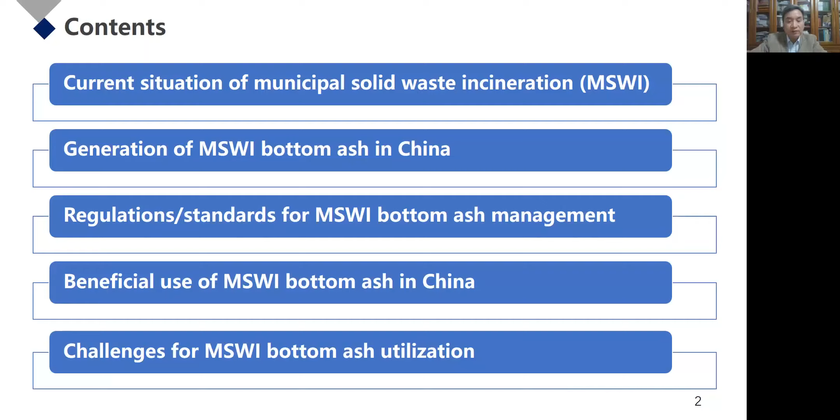Now, I will give you a brief introduction on the current situation of municipal solid waste incineration in China, the evolution of treatment capacity, and the uneven distribution in different Chinese provinces and cities.

Among which more than 99.8% were thermochemically or biologically treated or disposed of in sanitary landfill, while in the year 2002, the value was only 54%. To deal with the huge amount of solid waste, incineration with heat recovery has become the priority choice in China because of the significant volume and mass reduction, hygienic risk reduction, land saving, energy recovery, and it can be located closely to the source compared with landfilling.

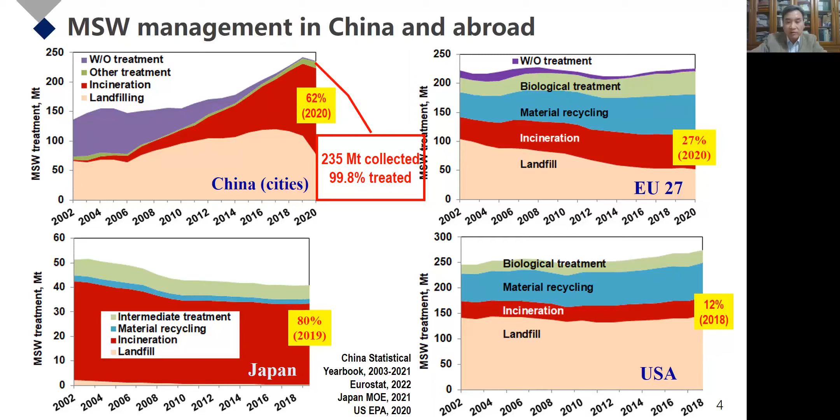Therefore, a rapid increase for incineration can be observed. In comparison, the incineration ratio in European countries, Japan, and the United States have been relatively stable in recent years, ranging from 12% in USA to 80% in Japan.

Incineration has become the mainstream technology for municipal solid waste management in Chinese cities. The treatment ratio by incineration increased from 2% in 2002 to 62% in 2020. The number of incineration plants reached more than 460.

In addition, the average treatment capacity of the incinerators is increasing too, around 1,030 tons per day in 2020, indicating that small-scale incinerators have been shut down and more large-scale incinerators have been put into operation in view of treatment efficiency or secondary pollution control.

All of the incinerators are equipped with heat recovery systems and steam generators. The increasing trend of incineration was also found in counties, where the incinerated waste reached 17 million tons in 2020, accounting for 25% of the collected domestic waste.

In September 2020, the revised law of China on prevention and control of environmental pollution by solid wastes came into force, which addressed nationwide waste classification and source separation. This encourages the continuous construction of new incinerators, as well as the booming development of biological treatment facilities for source-collected food waste. Furthermore, the zero landfilling of raw refuse promoted in many cities results in a significant decrease of landfilling ratio.

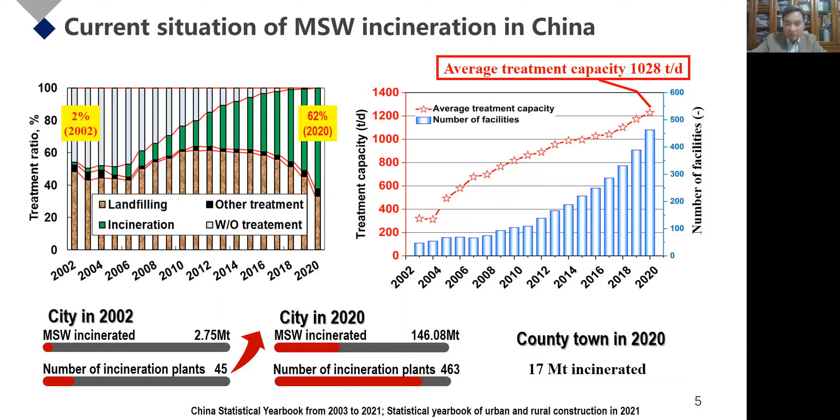According to the development plan of municipal solid waste classification and treatment facilities in the 14th five-year plan, the incineration capacity will further increase and exceed 65% of the total capacity by the end of 2025 for the whole country.

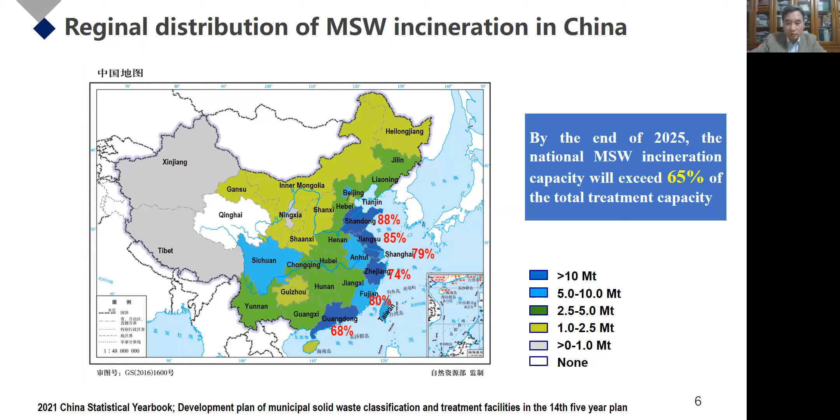Due to the great variance in population density, economic development level, climate differences, customs, etc. in China, significant difference of waste incineration in different provinces was shown in the map. You can see in eastern areas, which are densely populated and more developed, the majority of municipal solid waste is incinerated. The quantity of waste incinerated in the three provinces, Jiangsu, Zhejiang, and Guangdong, accounted for 1/3 of the total incinerated waste in the country. As a result, more bottom ash is produced in these three provinces.

Since so much municipal solid waste is incinerated, then how much bottom ash is generated? And what about their characteristics? The generation of bottom ash is significantly influenced by the types of incinerators.

There are mainly two types of incinerators adopted for municipal solid waste incineration in China: grate furnace and fluidized bed. It was reported that the yield of bottom ash from grate furnace is around 15 to 25% in the cities, while that from fluidized bed incinerators is only 5 to 10% on a mass basis of the incinerated waste.

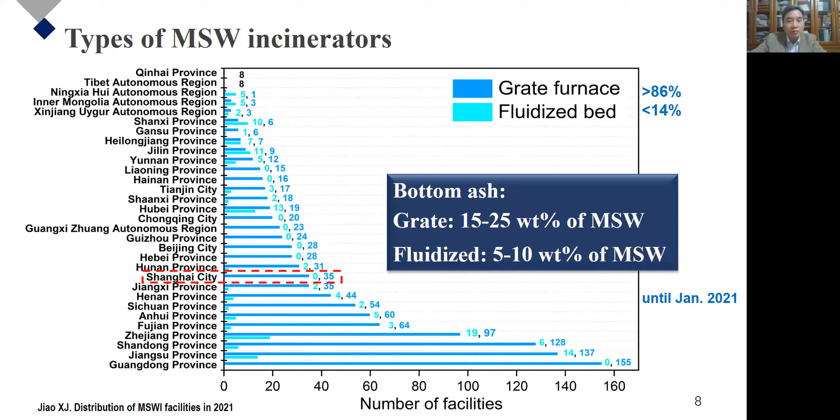This diagram shows the numbers of incineration lines in various provinces or regions till January 2021. It can be found that the number of grate furnaces accounts for more than 86%, and the number of fluidized bed incinerators continues to decrease because of exceeding permitted levels of carbon monoxide emission, more frequent maintenance requirement, as well as more generation of air pollution control residues, which are classified as hazardous waste in China.

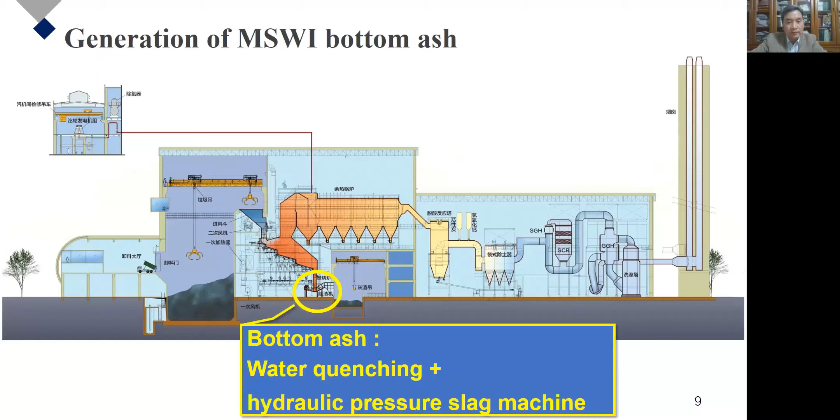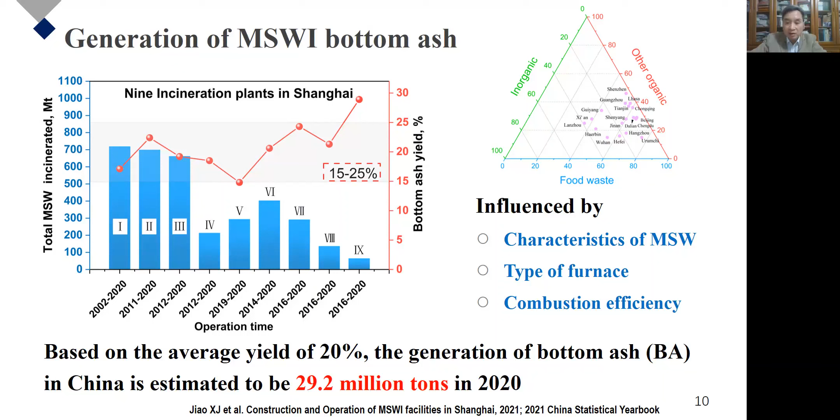Besides the influence of furnace type and combustion efficiency, the yield of bottom ash is also greatly dependent on the characteristics of municipal solid waste, which change city by city, as can be seen in the ternary diagram of waste composition: food waste, other organic, and inorganic. So an average value of 20% is used to estimate the generation of bottom ash from municipal solid waste incineration in Chinese cities, which is about 29 million tons in the year 2020.

Similarly, the contents and leached concentrations of pollutants from bottom ash vary with incinerators, locations, seasons, and so on, due to the differences of incinerated waste and incineration conditions. But in general, the leaching concentrations of heavy metals from bottom ash, and the contents of soluble salts and dioxins, are relatively low. So bottom ashes from municipal solid waste incinerators are usually classified as non-hazardous waste in most countries, including China.

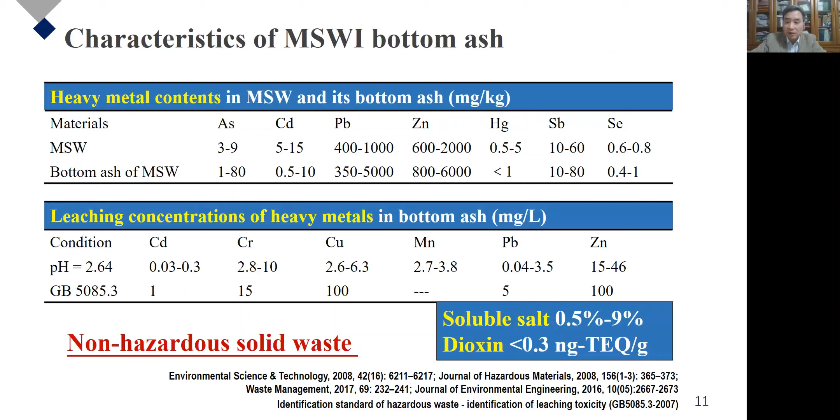As we know, bottom ash is composed of the inorganics from municipal solid waste such as melting slag, ceramic and brick debris, metals, glasses, and so on, as well as the unburned paper, plastics, and textile components.

According to the standard for pollution control under municipal solid waste incineration, the loss of ignition for bottom ash should be no more than 5%. In some cities, such as Shanghai, the limit value is 3%.

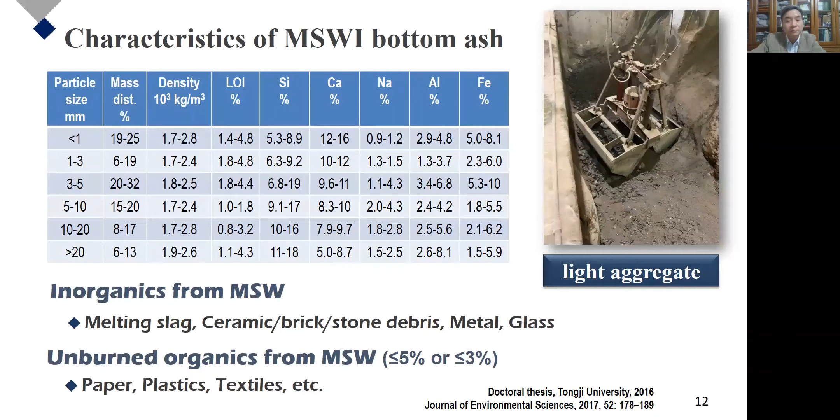To well manage the beneficial use of bottom ash and prevent secondary pollution during valorization, a series of regulations and standards have been issued in China. The highest level is the revised Law on Prevention and Control of Environmental Pollution Caused by Solid Waste, in which reduction and comprehensive utilization are highlighted.

In the year 2020, the Technical Guideline on Pollution Prevention and Control for Solid Waste Recycling was issued, which underlines the importance of environmental safety and human health during waste recycling. It is recommended to identify environmental pollution factors and take corresponding measures to prevent pollution.

For the valorization in construction, if the waste is recycled in cement manufacturing, the manufacturing process as well as the cement product should comply with the standards for co-processing of solid waste in cement kiln. Meanwhile, if the waste is recycled to produce aggregate, road-base materials, bricks, glass, or ceramic products, the manufacturing process should comply with related industry standards, and the pollution control for the product can refer to the standard of cement from co-processing solid waste.

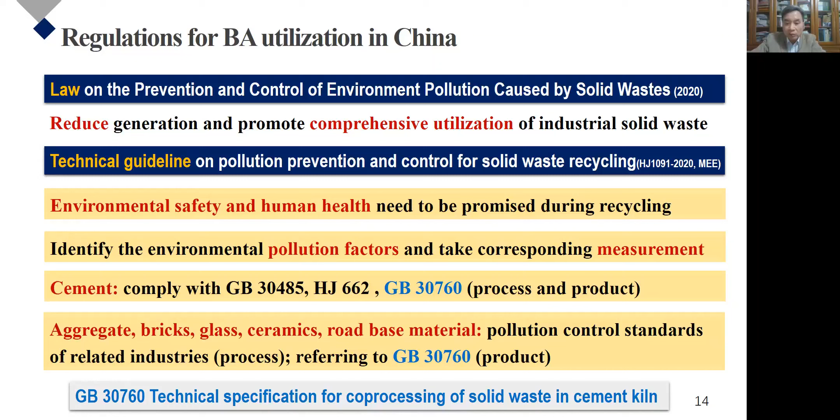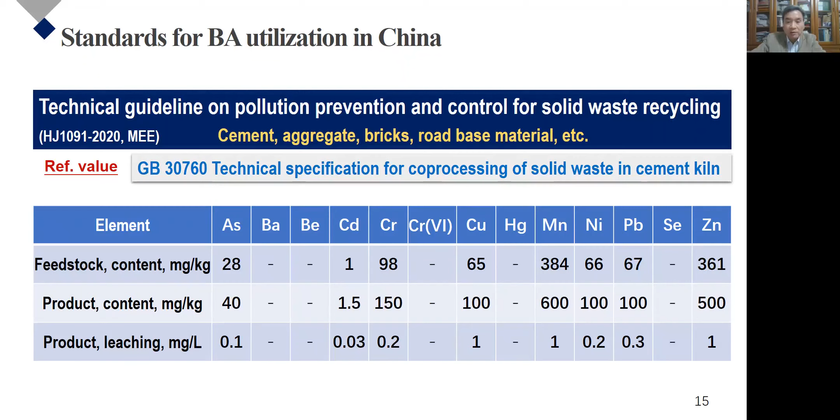In addition, other products such as aggregate, bricks, road-base materials, etc. have no specific standards, so they are recommended to refer to the standards for cement from co-processing of solid waste.

For bottom ash aggregate, a specific standard was issued in the year 2010, in which the limits of radionuclide, loss of ignition, and leaching toxicity of heavy metals were proposed.

Besides the technical specifications for the coarse and fine aggregate from bottom ash, such as the size grading, contents of metals, light substances, moisture, and compressive strength, the leaching toxicity refers to the identification standards for hazardous waste, which is less stringent compared with the recommended values for cement as listed in the last slide.

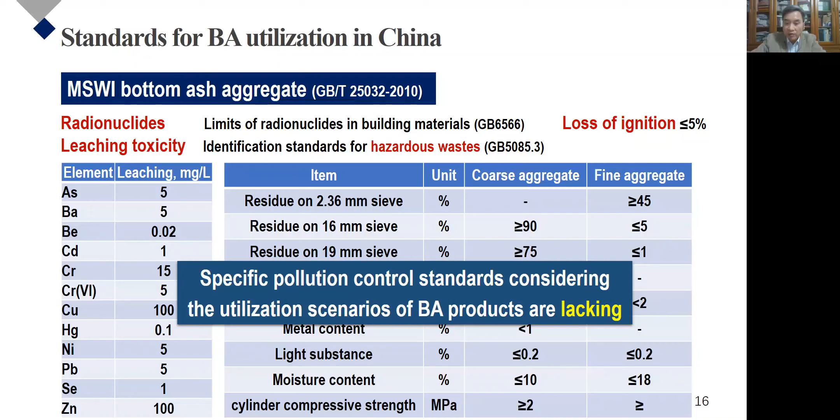In conclusion, specific and compulsory pollution control standards with regard to the various utilization scenarios of bottom ash derived products are lacking nationwide. As far as I know, there is a group standard for bottom ash utilization under preparation, which was proposed last year.

For example, in Shanghai city, a local standard was issued in the year 2017, which addresses the technical specification for application of bottom ash aggregate for road engineering. The different usages, including subgrade backfilling, improvement layer, subbase layer, and base layer, are considered.

Besides moisture content, bulk density, and crushing value, the soluble salts of chloride and sulfate, leachate pH, and conductivity are also regulated.

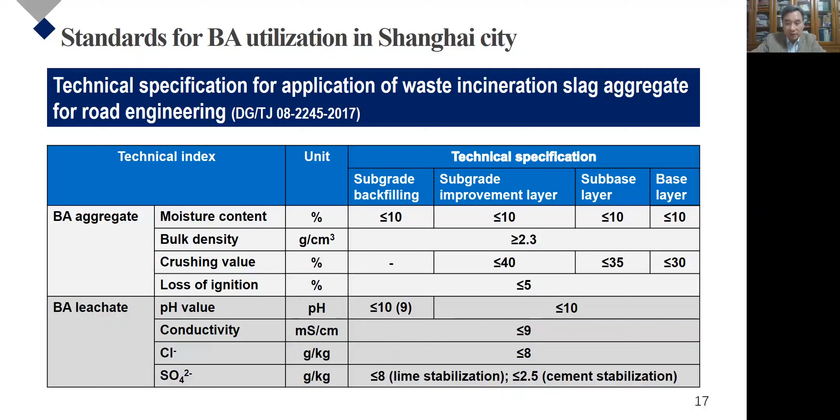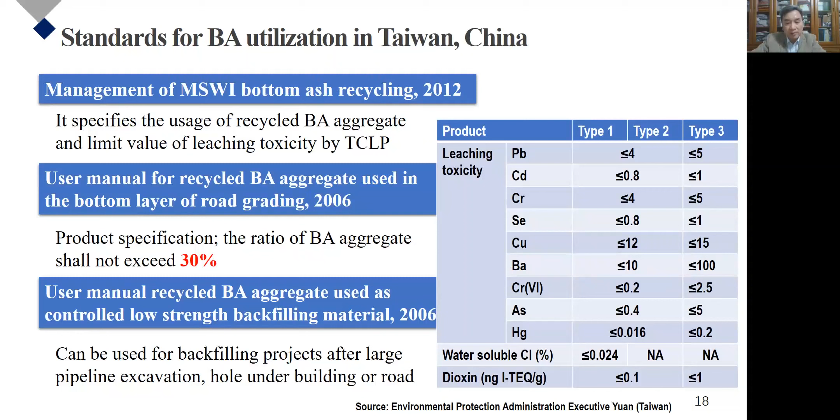Another example, in Taiwan, 3 regulations or guidelines were published to encourage the bottom ash recycling, as well as the valorization of bottom ash aggregate in road grading and backfilling materials. The leaching toxicity, water-soluble chloride, and dioxin content in different types of product are regulated.

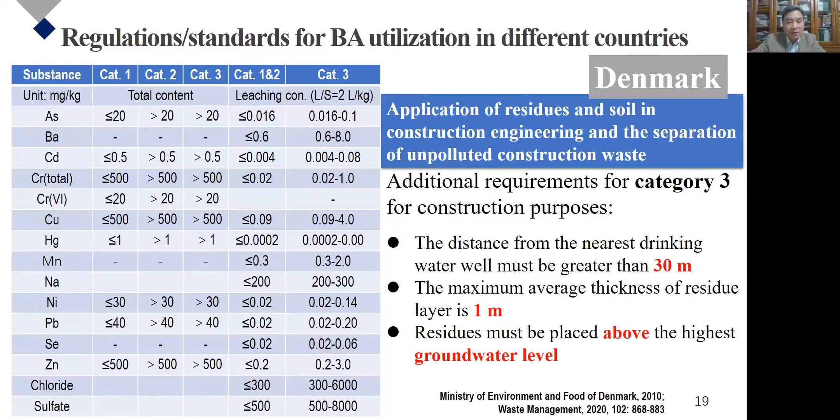The regulations for bottom ash valorization in construction in European countries can be good references for us. In Denmark, for example, the total contents and leaching concentrations of heavy metals, as well as leached chloride and sulfate, are defined for the application of residues in construction engineering, together with restrictions on placement locations. Netherlands and Germany also have standards stipulating technical specifications and environmental pollution prevention for bottom ash products as building material.

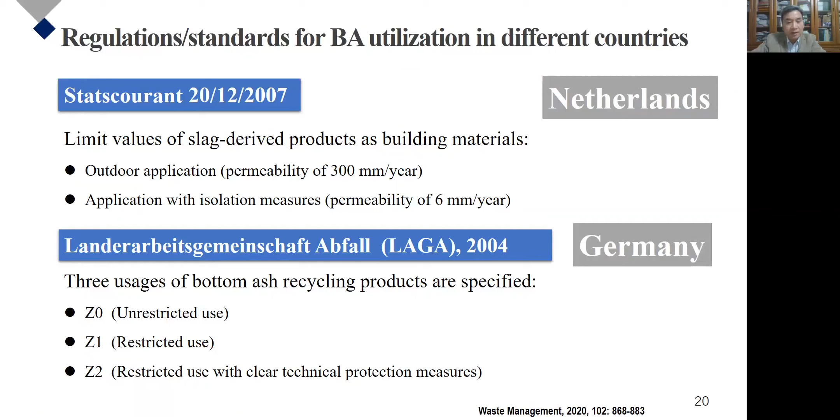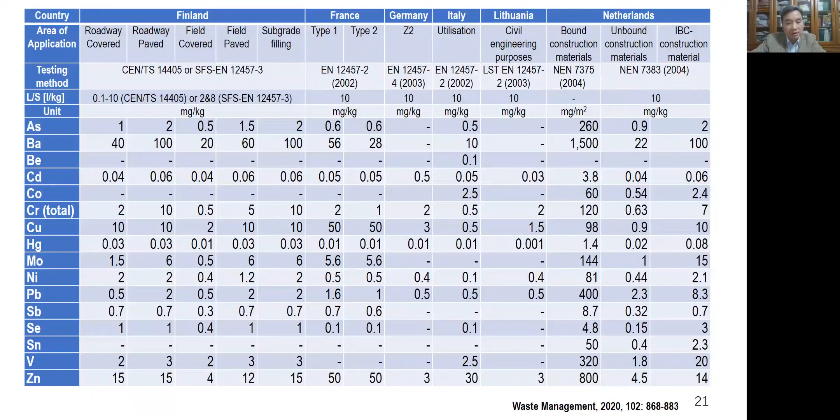This table summarized the limit values of leached heavy metals for the various utilization of bottom ash in road engineering and civil engineering in some European countries, which shows a variance.

Japan also supports and encourages the use of municipal solid waste incineration residues to prepare concrete aggregates and subgrade materials. Similarly, the contents and leaching concentrations of contaminants are restricted to prevent pollution.

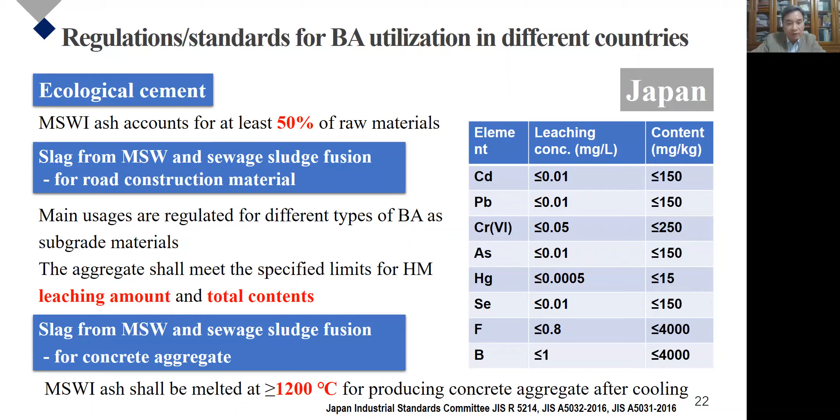For China, more work needs to be done for improving the standard system in order to manage bottom ash valorization in an environmentally friendly and economical way in the future. It has already been addressed by the government that development and improvement of the standard system is one of the important works in the 14th five-year plan.

Guided by the limited regulations and standards, beneficial use of bottom ash as construction materials has already been applied in different municipal solid waste incinerators in China, and pretreatment processes have been developed to recover valuable metals and remove unburned substances.

According to a survey carried out by the Ministry of Housing and Urban-Rural Development of China during 2017 to 2018, around 82% of bottom ash was recycled, 15% was landfilled, and 3% was co-processed in cement kilns. Most of the recycled bottom ash is used to produce baking-free bricks or aggregate for road engineering.

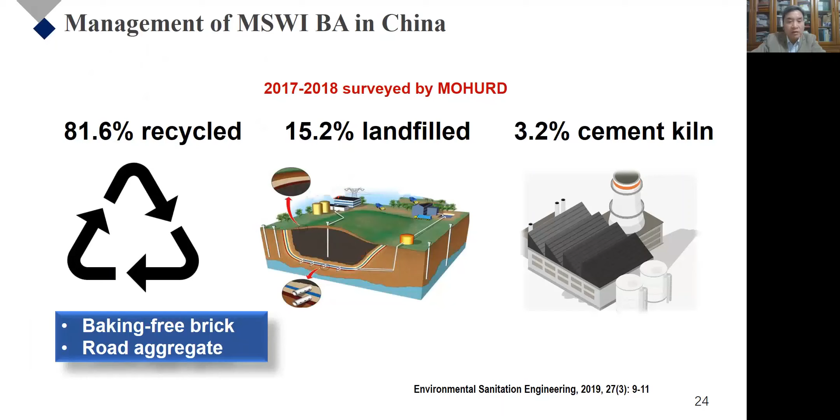Before utilization, pretreatment is necessary to adjust the size distribution, remove unburned organic matter, and recover ferrous and non-ferrous metals. There are mainly two kinds of pretreatment processes for bottom ash: wet and dry methods. Because bottom ash is usually water quenched and removed from incinerators, wet pretreatment has been widely used in China.

This schematic diagram shows a typical wet process. The unburned substances are fed back into incinerators. By wet crushing, magnetic jigging, and shaking separation, ferrous and non-ferrous metals can be recovered, and aggregate, usually with size less than 10 millimeters, is obtained.

The aggregate product is of poor size grading, so it is mainly used in building materials such as bricks and cement blocks. About 30% of the bottom ash will end up in the sludge, which is enriched in heavy metals and is then usually landfilled or just dumped.

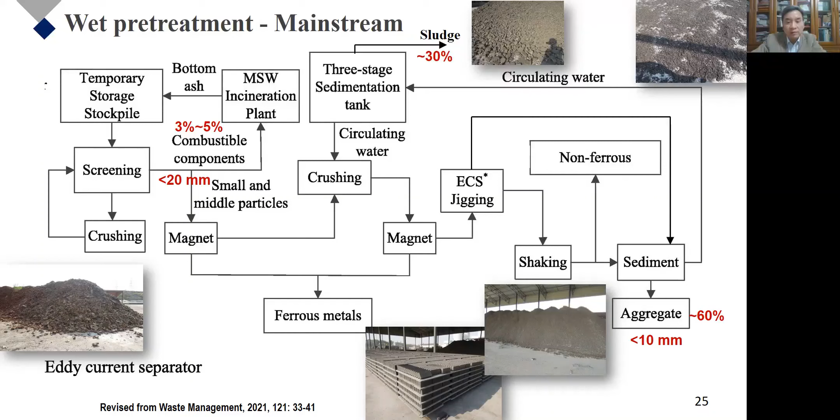Furthermore, its recovery efficiency for aluminum is not good, and water consumption is high, around 0.5 ton of water for 1 ton of bottom ash considering water recycling. However, the wet process has a good separation efficiency for copper compared with the dry method, which has a higher value, so it is more profitable. As a result, it has become the main technology for bottom ash pretreatment in China.

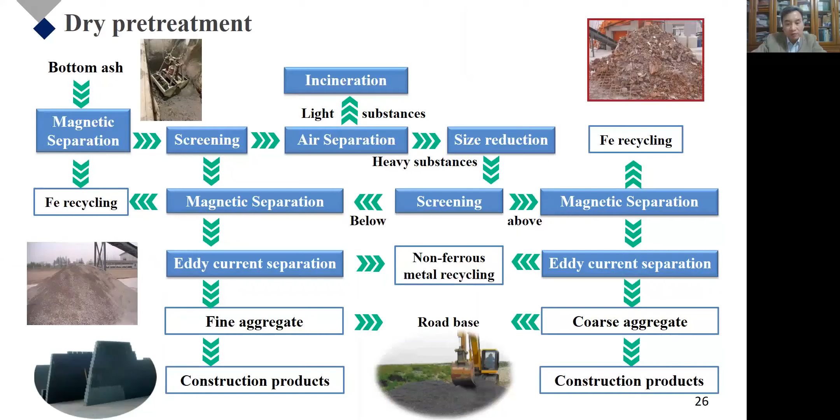In a few incinerators, the dry pretreatment method is adopted, which includes screening and size reduction, air separation, magnetic and eddy current separation. The aggregates are well graded, so they can be used as road aggregates or other substitute aggregate in construction products. Two-stage eddy current separation is usually adopted, for which the recovery efficiency of non-ferrous metals from bottom ash with size less than 5 millimeters is not satisfactory.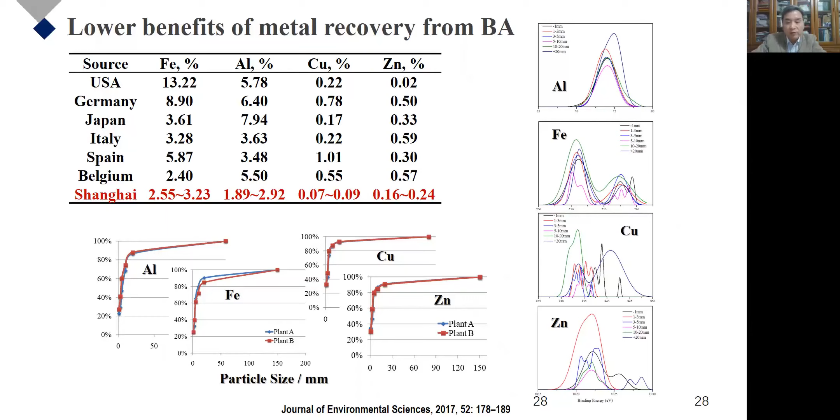Now, let's talk about some challenges we confronted during bottom ash valorization. The first challenge, according to our study, is that the bottom ash in China contains relatively low [content], which also influences the quality of the bottom ash material. The ferrous and non-ferrous metals need to be refined before utilization, as they are partially oxidized during incineration.

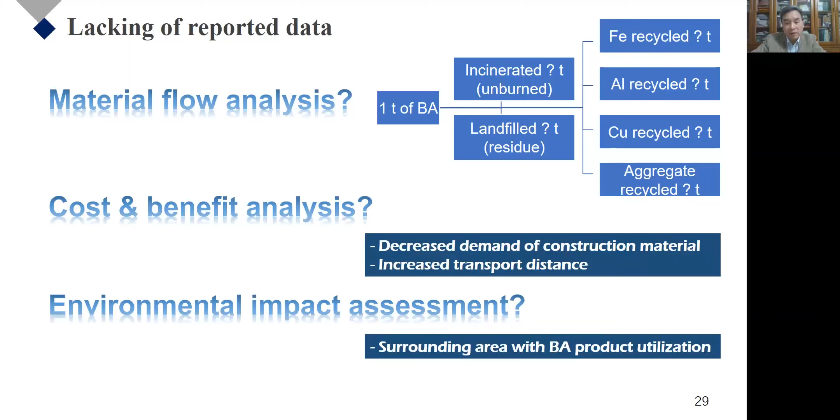Data on the cost and benefit analysis, environmental impact assessment is based on field applications of bottom ash in China. It is usually private construction material manufacturers, small scale, instead of incineration plants, who are responsible for the pretreatment and utilization. They usually don't like to share operation data, and long-term environmental impacts are not well addressed. The insufficient data inhibits proper improvement of technologies as well as corresponding standards.

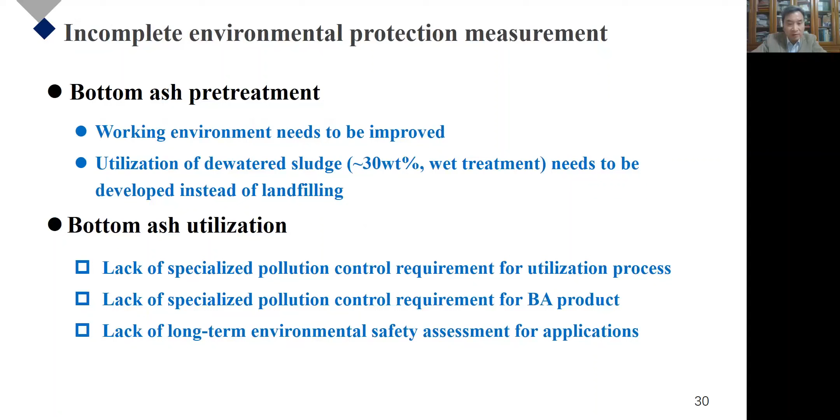For the utilization of bottom ash products, there is a lack of specialized pollution control standards for the process, as well as for the product, considering different application scenarios as mentioned before. By now, we still have no standards and guidelines on environmental impacts and risk assessment for beneficial utilization of bottom ash. Is it safe for utilization in the long term?

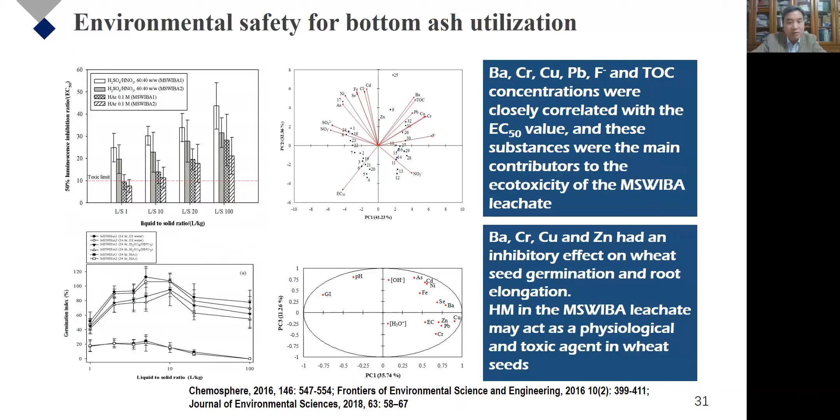There is an urgent need to improve our standard system for better management of bottom ash utilization. Anyway, we know more work needs to be done in the future. That's my point of view. Thank you for your attention.